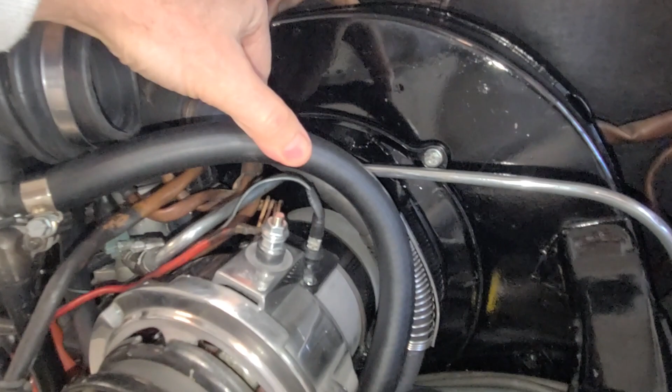Right, so the thing about some of these older cars is that a lot of these custom parts, the things that are like rubber boots and little caps and things like that, they're really hard to source after the car is no longer in circulation. This is a 1979 Super Beetle.

Recently, we just replaced the alternator, and we need to replace what would have been a rubber boot over the top of this positive wire. This is the main charging cable that charges the battery. This red wire goes straight to the positive battery post. So you can imagine if you were to ground this, it would short. I mean, it would be a fire, it would be a problem.

So you can see a really large, sort of a hard plastic insulator right here. This is going to be what we're going to need to insulate against. And then on this side here, there used to be a boot on here, and I went ahead and just used some shrink wrap. But as you can see at the bottom down here, they have a little connector that has a rib right here. So it's intended to have a boot on that as well.

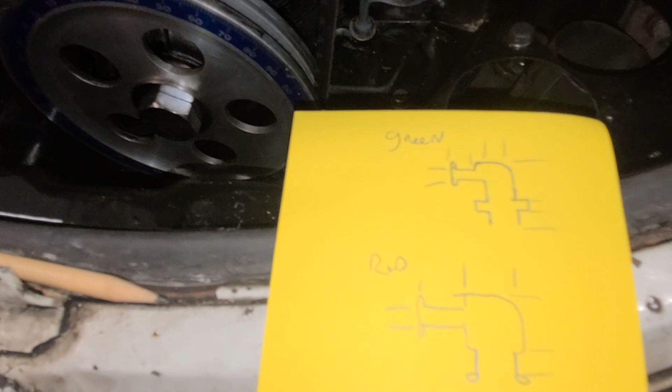So what I'm going to demonstrate on the video today is how to make replacement boots for electrical components using a 3D printer. So let's go ahead and get started. The first thing you need to do is start with a mock-up of what it is that you want to do. In this case, this is the red wire's boot. It has a flat connector around the base. And I have a little ridge here so that when we put a zip tie on there, it won't slide downwards.

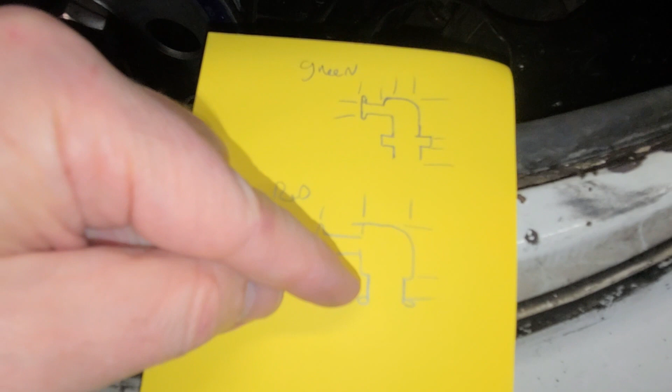And so you need to know the inside diameter of those nuts. You need to know the diameter of that little rubber casting, because that's what we're going to connect to. You need to know how long you're going to go, and then we're going to also put a zip tie on this side as well. So this is just kind of a cross section. These are all cylindrical shapes, and we're going to make an extrusion on that, and then we'll print them out.

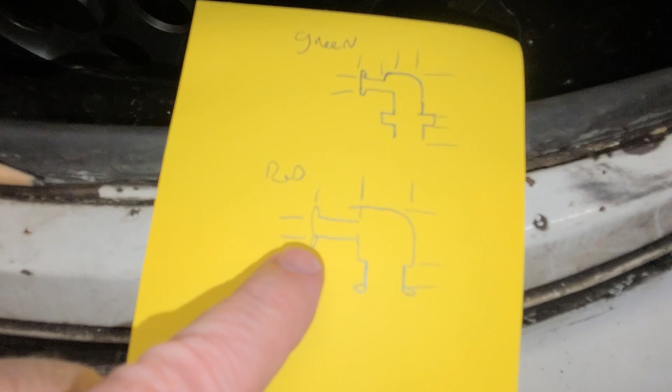Now, if you're wondering how we're going to get the wire through there, I'm actually going to print this with a slot open on this side right here. When you connect it, you'll be able to slide the wire in there. It'll clip on, and then you put a couple of zip ties on, and it'll close it, and it won't come open. Same thing on this one.

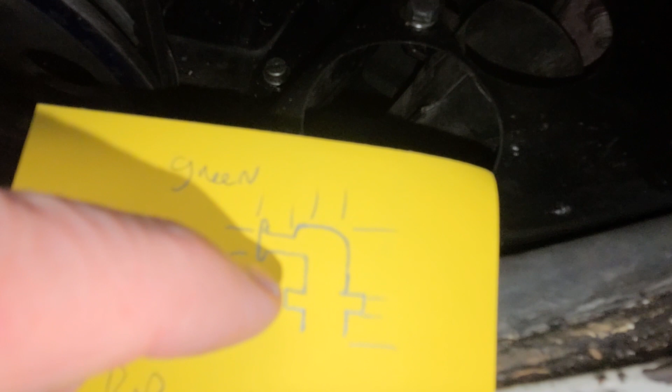You can see I've kind of over-exaggerated the little ribs where that little rib goes. Right down here, you can see there's a ridge that wants to have a boot that clips down in there. So we're going to make the boot go around that and clip into this ridge. That's what this ridge is to tell us to do. We're going to make the measurement so that it fits in here. Again, this is just a cross section of what that will look like: how high we're going to go, and how far we're going to go right here.

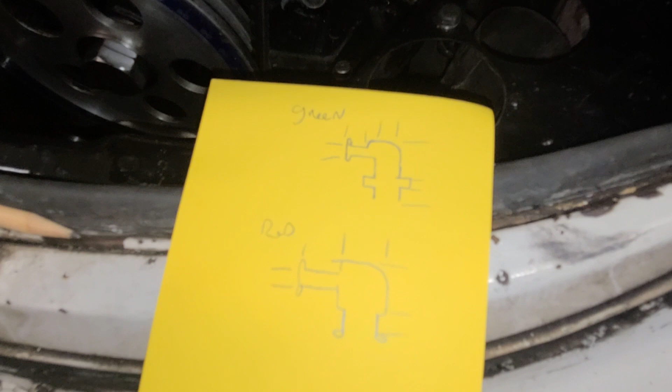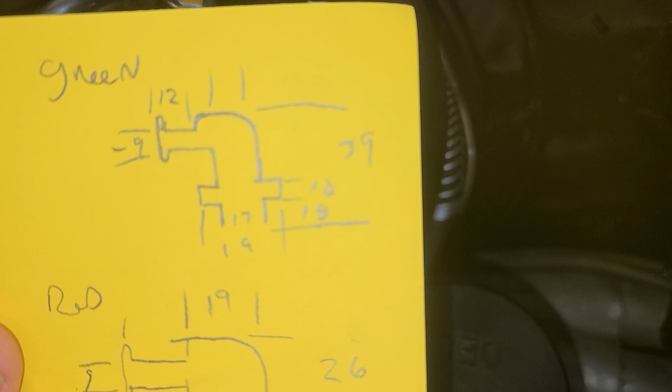So I'm going to take these measurements, and then we'll get on to Onshape, which is the 3D modeling software that I use for making my 3D parts. Let's go ahead and measure this up. All right, so there you go. I got all my measurements in millimeters, no decimal points, and everything will be flexible. We're using PETG, which is heat-resistant, so once you form it, it'll be able to handle the engine temperatures just fine. So let's get these onto Onshape and do some 3D modeling.

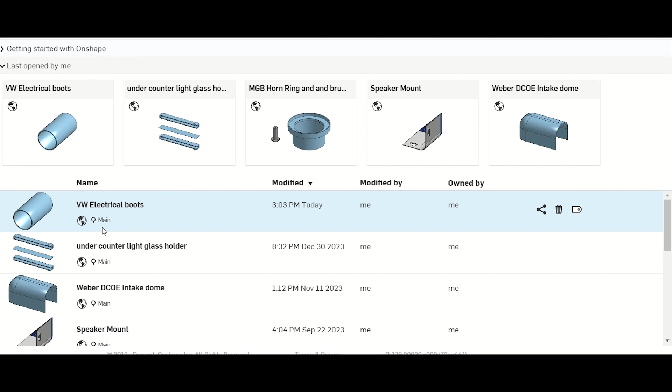All right, so here I am in Onshape, and here's my growing collection of custom car parts that I've created. Here's the first of the electrical boots. You can see this is the red one. It has a little bit taller stack at the top. I put a fillet on the top up here.

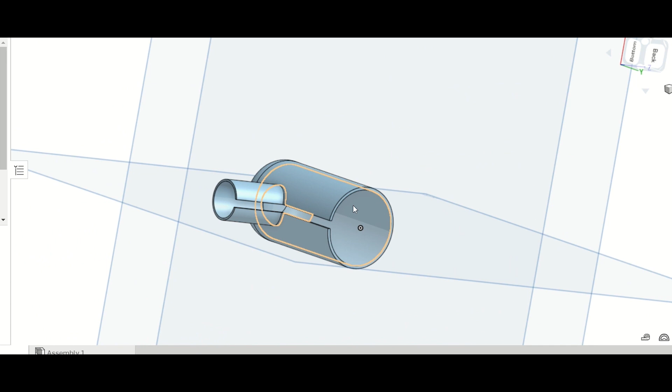Let me see if I can get this in here. You can see we put a little slit in the groove right here so that it'll be easy to take on and take off, and yet it'll still be a really good shroud to keep any kind of electrical short from happening on that red wire. All right, so let's get this into the 3D printer while I start doing the mock-up on the second boot, which is the smaller one of the two.

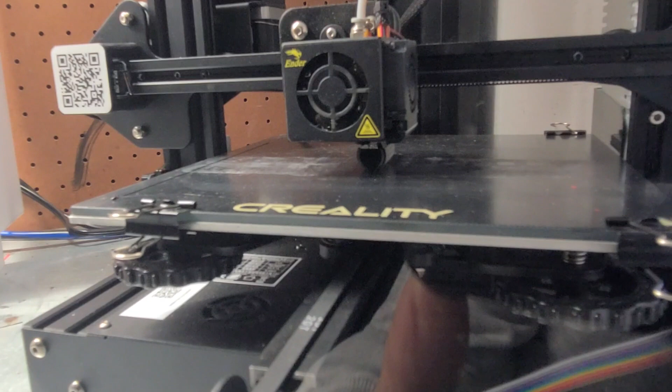All right, so there you have it. There's the 3D printed cap that we're going to put on top of this stud right here. You can see we took the measurements. Everything measures up right. The top goes to the top. It doesn't hang too high up. And this little T comes off right where that is. If you slide this right on there, see, it's got a slot right there. You slide that on, and there you go.

That's the end deal. So that is how to 3D print an electrical cap on your 1979 Super Beetle alternator, or any other part for that matter. Being able to print 3D parts on your classic cars is a great capability.